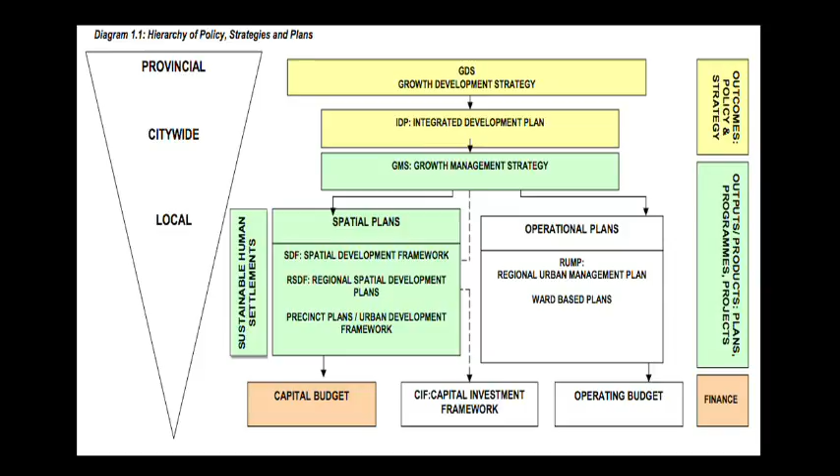Then the next level is your development planning applications—this can be rezoning, consolidation of plots, township establishment, and that sort of planning application. The other side of it is where you might work for a local authority, where you have to assess these applications and give approval.

And then the nicer field, what I think about planning, is more your spatial development, where you're looking at urban design, your layout plans for a region, township establishment, where you actually do the layout of the township. So that's sort of the various fields in town planning that you do get in South Africa.

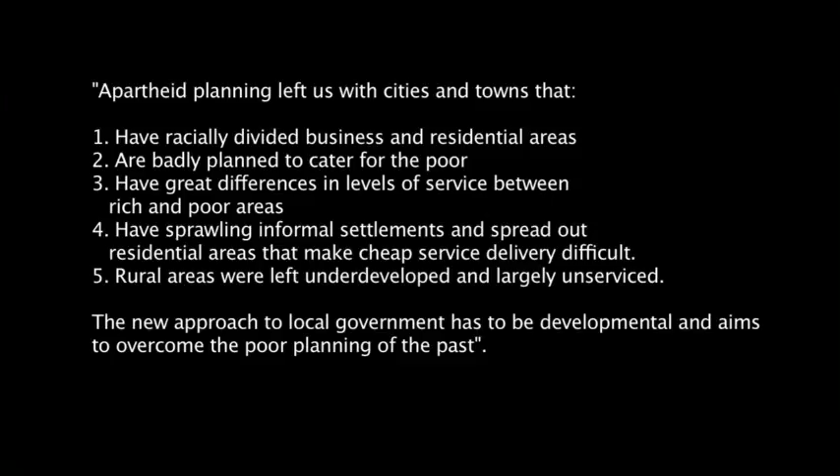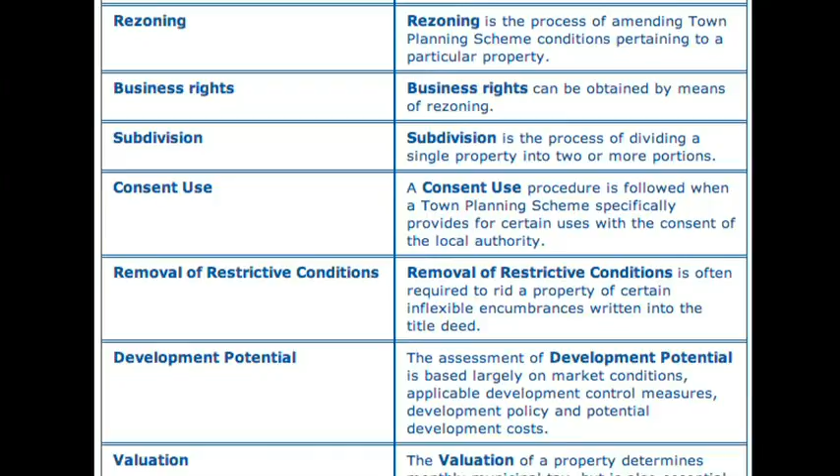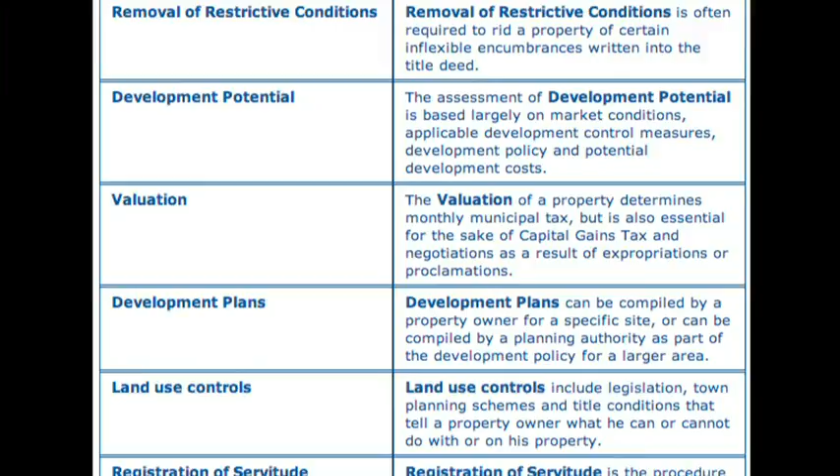Normally when you start looking at a development or get approached for a new development, it always starts with the identification of a site—whether that's in a township area or a town area, whether you need to do rezoning, consolidation. A lot of times, especially with our housing projects these days, you still need to do township establishment.

And that's where you get all your various other entities involved, like the engineers, the geotechs, the land surveyors. Township establishment specifically—where you draw your plans and then have to get your engineers involved to see if there are services, what needs to be done to get services to this area, and whether your layout plan will fit in well with the engineers, particularly stormwater, electricity, water, all sorts.

And then with the site identification, you also have to do a geotechnical report to see if the land is suitable for the type of development that you're looking for. And then you get your land surveyor.

With township establishment, you need to get approval through your Surveyor General. But that always happens most of the time after the town planning process has been approved or council is happy with the layout, because at the Surveyor General they don't want to keep on changing their plans.

So at that process already you get your engineers involved to get advice on the services, your geotechs involved with the geotechnical report, and your land surveyors to do the pegging from first the 5-meter contour, to see the layouts and how it will fit in with stormwater, up to the approval of the land survey by the Surveyor General. The thing with town and regional planning is it's always a participation process.

You always get all your parties involved from day one. You can get through the whole process and reach the end where there's no approval because people jump up and say no. Specifically with housing development, we get to the point where the township is established, the layout is done, and engineers have been involved. Part of that would be your application, either a subdivision, which is mostly the case, or a rezoning. With that you get involvement from your engineers, your water, all your service levels. After the approval has been done, from there onwards it's the council and the engineers' responsibility.

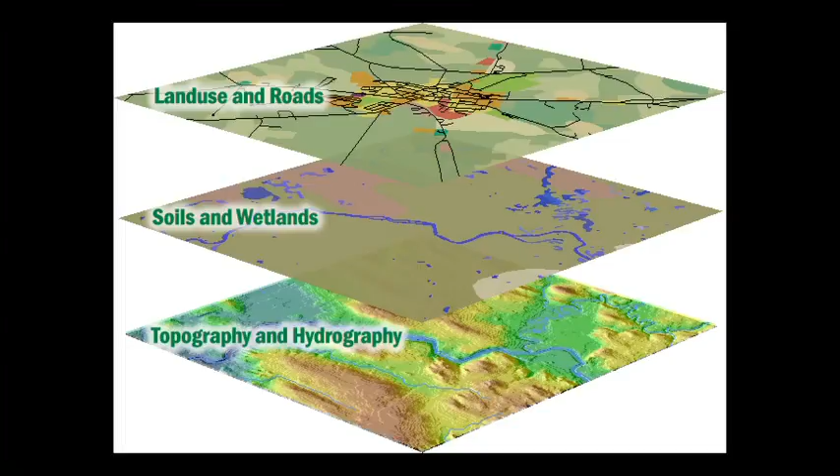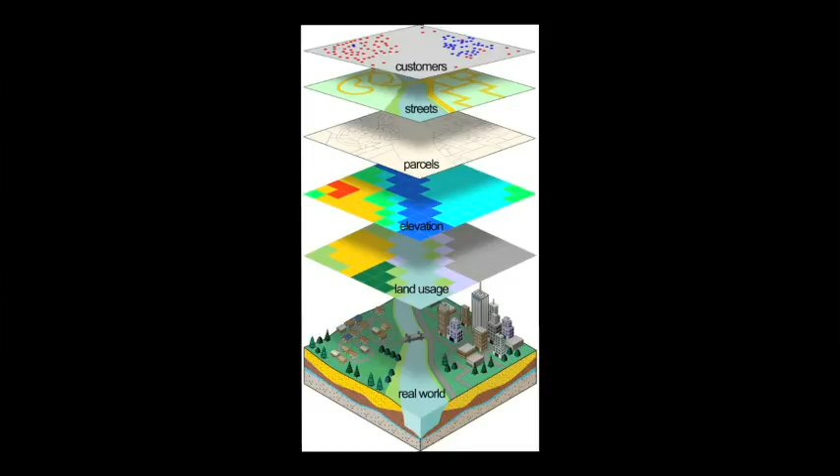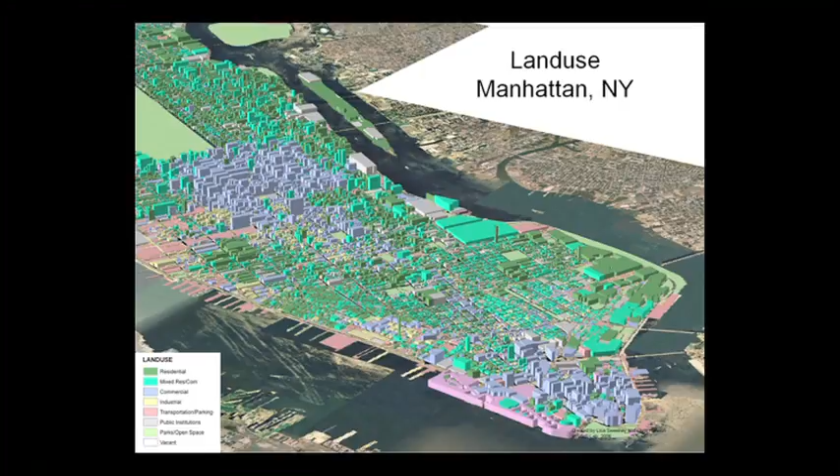I think the biggest thing these days is GIS. All your requirements when you submit a proposal for spatial development frameworks, etc., is always GIS based. That's the biggest tool that we use. It's such a big database that you can just build on. Most local authorities have GIS databases, and your spatial development framework and land use management systems are in so much detail that you can click on a site and it will tell you what is on there, what is allowed to be changed if there's a change of use, and what is not allowed. It's very specialized and in-depth, depending on how many layers you want to build, but that is such a useful tool.

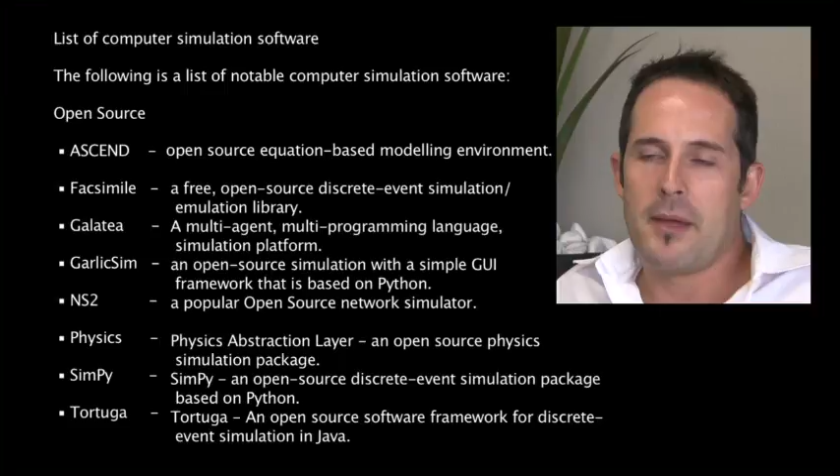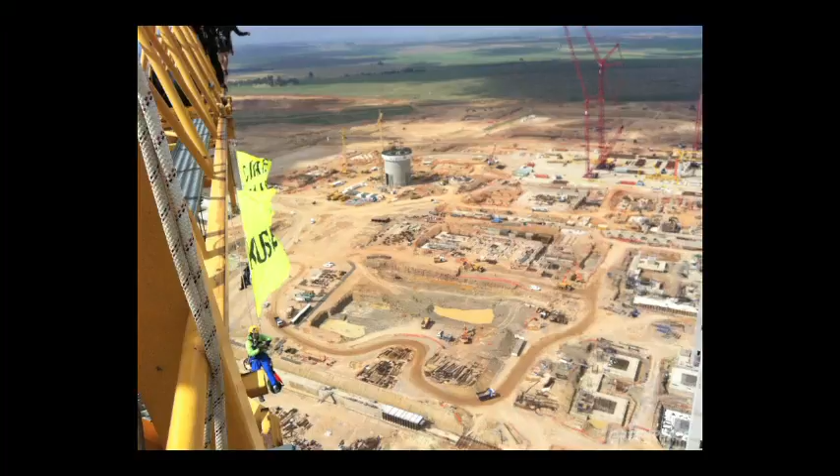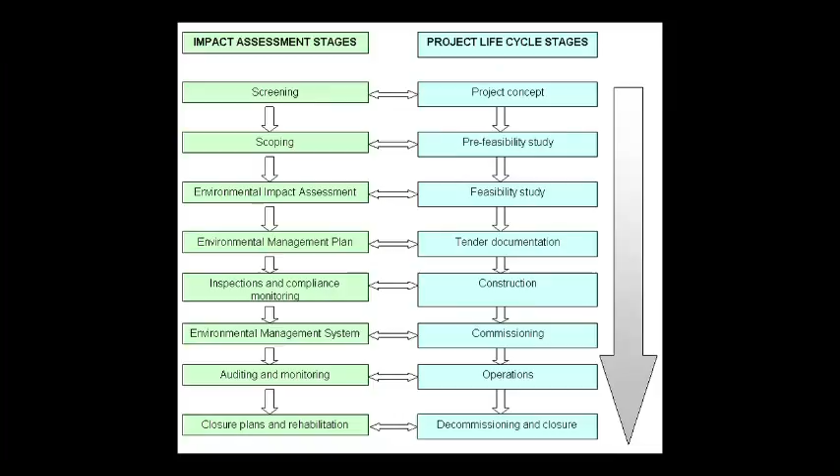Environmental is a big role these days, with your environmental impact assessment, and it depends whether it's a full EIA, the level of EIA needed with every application. It's a lengthy process and it can slow down our planning process, especially with the DFA where you have to submit everything at once to get it running. There's time for consultation and everything. I also know when you apply for a planning tender or job, normally you can't go for the environmental part as well because it's a conflict of interest. It sometimes feels that the environmentalist has all the say, especially when it gets to wetlands which are already dried up, they want to keep it, and you want to develop, and that whole process of trying to get approval can sometimes be a nightmare.

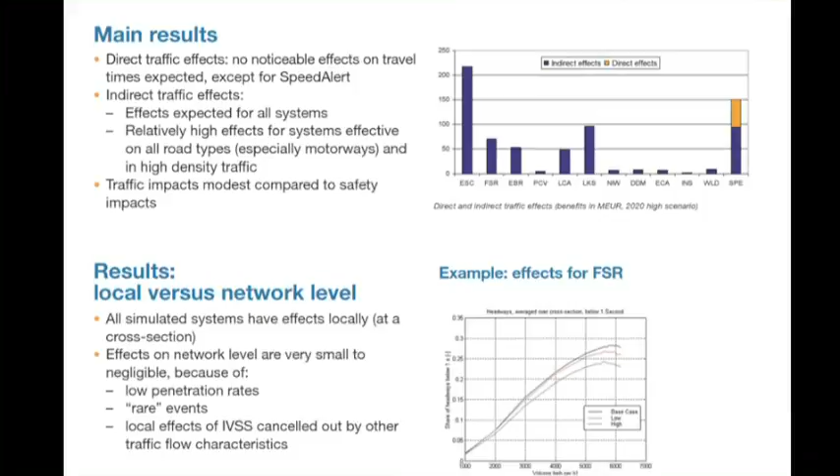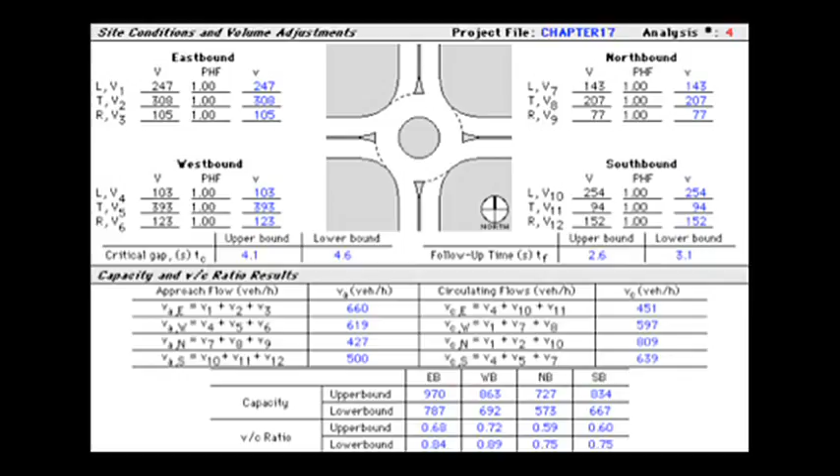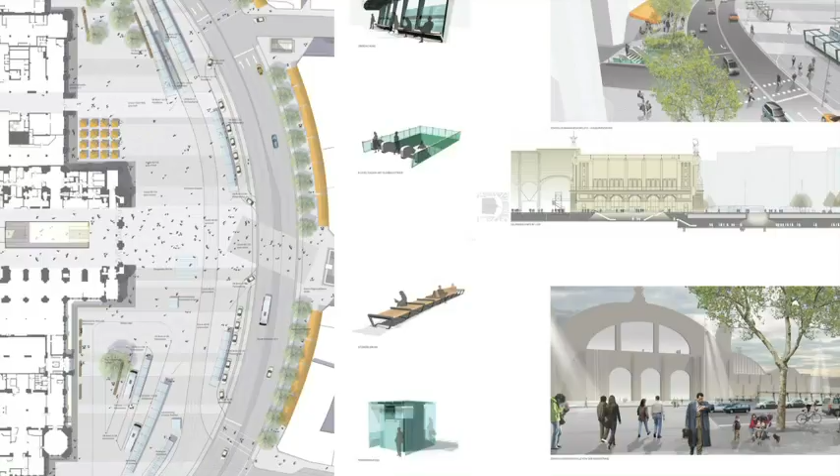Then again, traffic impact assessments for major applications are quite interesting - you need to provide that to see what more traffic would be generated. There you can go into various traffic and transport models. I know not a lot of traffic engineers are doing that. You get macro and micro simulation models, and especially the micro, it's like software such as AIMSUN, where you can even build the streetscape with pictures and actually show your client: here's your building, and this is the traffic that's going to pass there, the chaos, congestion and all that sort of thing.

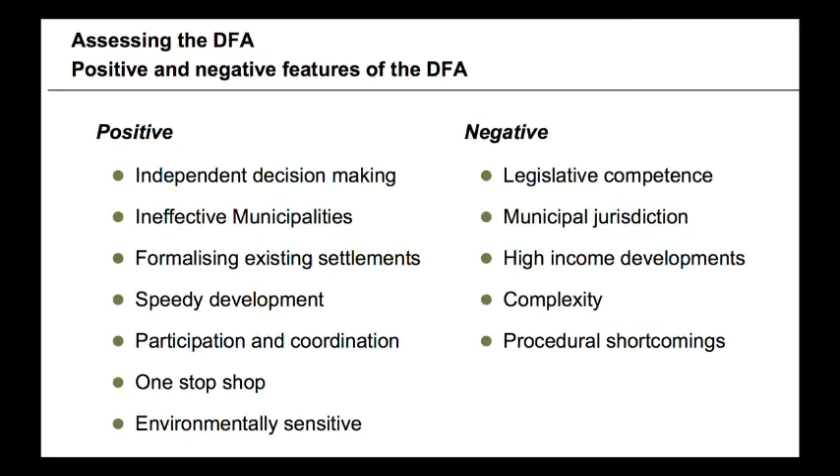There's various acts that we need to abide by - your Municipal Act, your Development Facilitation Act, your ordinance. The DFA came in basically as a quicker process, but whether it works or not is another question, because of the public consultation and the legal process an application needs to go through, it's a lengthy thing. You're looking at roughly 18 months to develop or review a spatial development framework.

My name is Piet Lombard, from PD Naidoo & Associates, Consulting Civil Engineers, and the topic we will be covering today is infrastructure design for residential, commercial, and industrial townships.

I've been a consulting engineer most of my life. I started consulting in the 60s. For about 15 years I worked with consulting engineers. Thereafter I joined Midrand Town Council as a town engineer for 3 years, after which I became a township developer for approximately 5 years, but then decided to go back into consultancy. I had my own practice for approximately 15 years, and for the last 8 years I've been working for PD Naidoo & Associates.

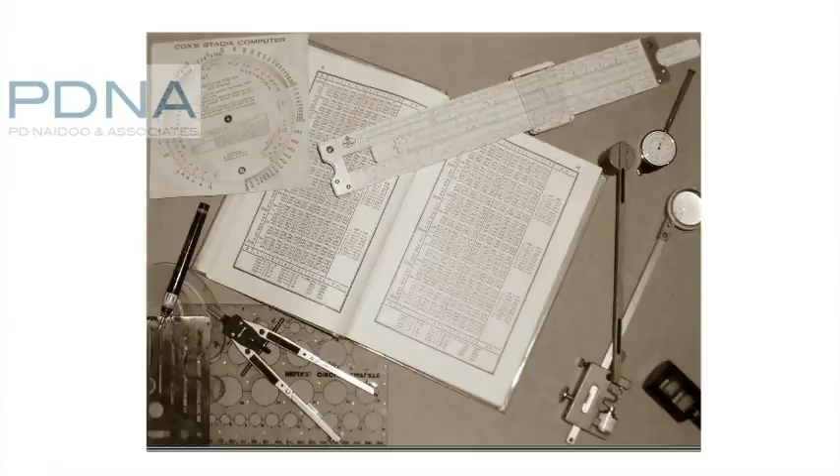For me, I think hands-on design is probably one of the most important things one must teach yourself to do. You must always try to stay abreast with the latest developments. In the 60s, to calculate the bearing and distance between two points of which you knew the coordinates was time consuming - you had to subtract one coordinate from the other, get the y and x differences, use these in formulas, and all this was done by hand. I'm very happy to say that with the software available today, it's become more and more productive to do your designs.

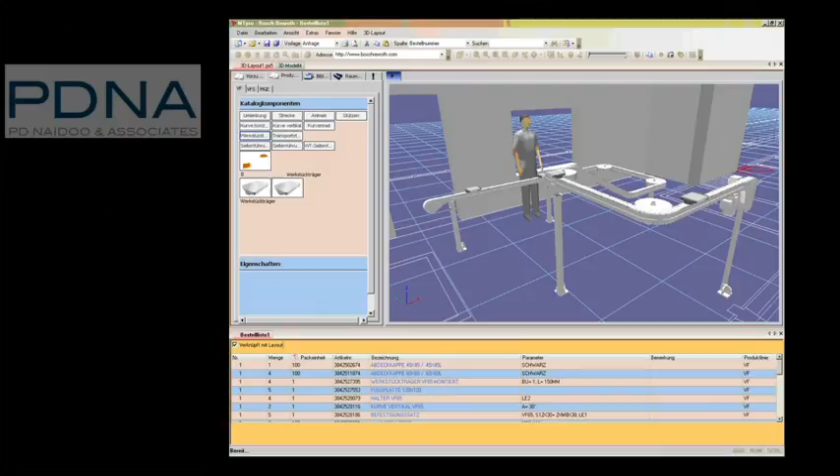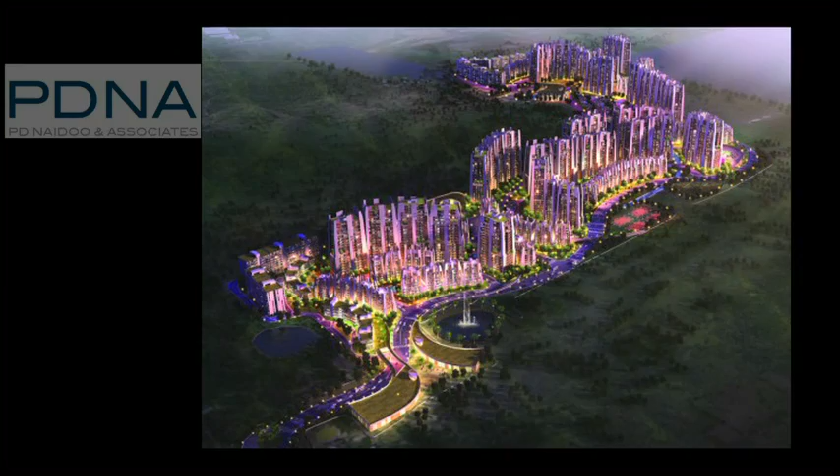I think as a consultant you always need to be proud of what you do, and most importantly you have to take responsibility for what you do. In a big company there's a tendency to think that your managers, directors, or the board of directors will take the responsibility, but I think it's very important that we all realize that what we design is our responsibility.

When you start with a project and you start designing, make sure that you gather the necessary information. Understand what the brief is from the client. Know who's who in the project, who's your town planner, who's your architect. Go to the local authority, find out what their preferences are.

They've got certain things in their municipal area that work and things that don't work. Make sure you have as much information as possible, either by physically visiting them and taking photos. Obviously there's a lot you can obtain via email and telephone, but I think to visit the local authority and introduce yourself is already a good start. Try and do that up front. Try and do your cost estimate that they want on Monday, on Saturday and Sunday, so that you can spend time with the local authority, but it's very important to go and see them.

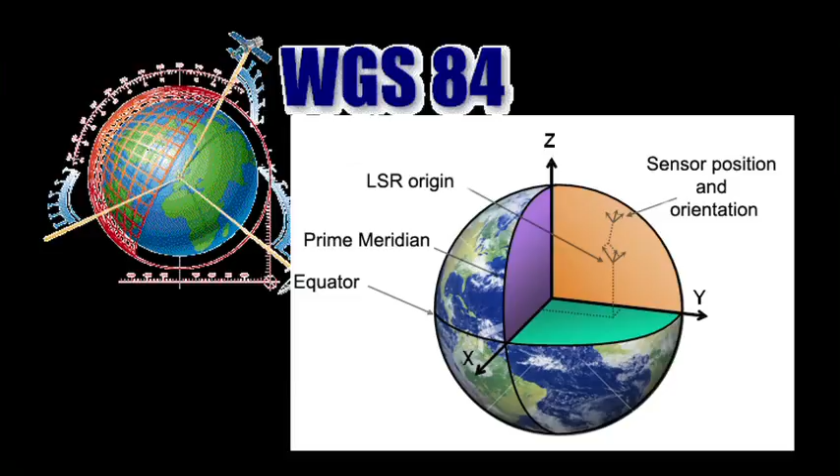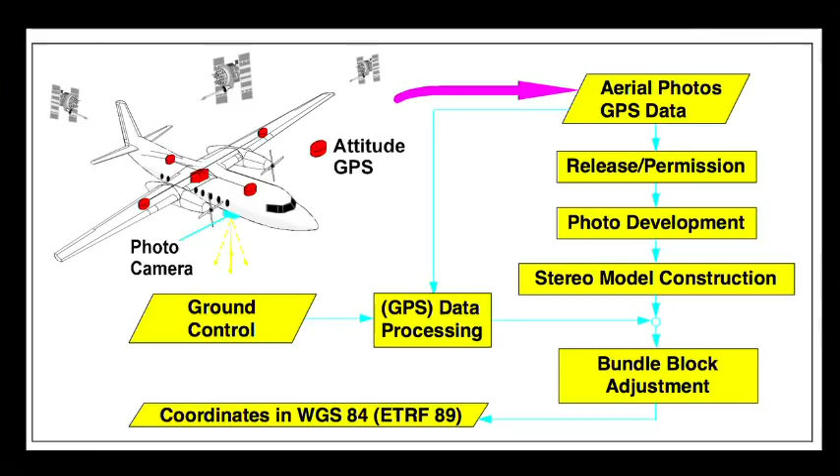Establish what the preferred positions, the depth order and the elevation ranges of certain services are. Make sure you know what survey system to use. We're bound now to use the WGS 84 system. Stick to that, and when you produce a drawing, put two tables on the drawing, one in the old system that they prefer and one in the new system. Here in the Gauteng area we work with LO 29, going a little bit westwards, maybe switch over to LO 27.

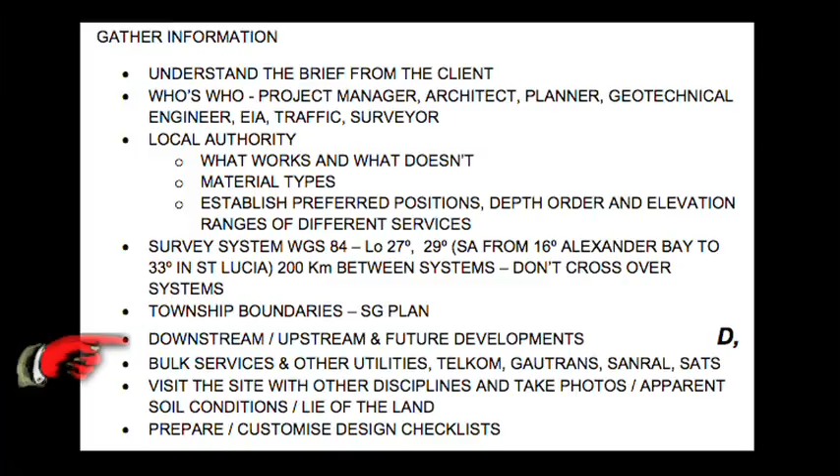But the whole of South Africa goes from LO 16 in Alexander Bay to St. Lucia, LO 33, so make sure that you're in the right corridor when you work with it. Make sure you know what the township boundaries are. Get an SG plan from the Surveyor General. Know exactly what the coordinates and the extremities of the thing are, because the whole design is going to be based on those measurements. Try and find out when this is going to happen—is it going to be 20 years before there's development upstream, or is it something that's going to come in the next couple of years? Make sure you're au fait with whatever's going to happen upstream and downstream of your township.

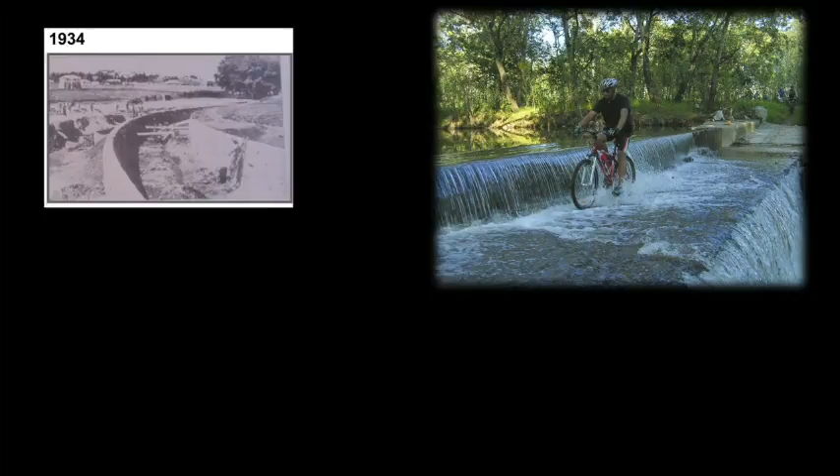One of the best examples that I have is the canal they built here just off Empire Road. The municipality of Johannesburg built that in 1934. They'd just come out of probably one of the biggest droughts this country has ever had, in 1933. And yet, while that year was going on, these guys were sitting planning and designing this monstrous stormwater canal. Up until today, it's serving its purpose. I think that is very innovative and very proactive to have done that.

Find out all about bulk services and other utilities—Telkom, Gautrans, SANRAL. Find out about these things and make sure that you are okay with that. No one else is going to do that for you. I must say lately the town planners are handling the bulk contribution side of it, but you must still know what bulk contributions are all about.

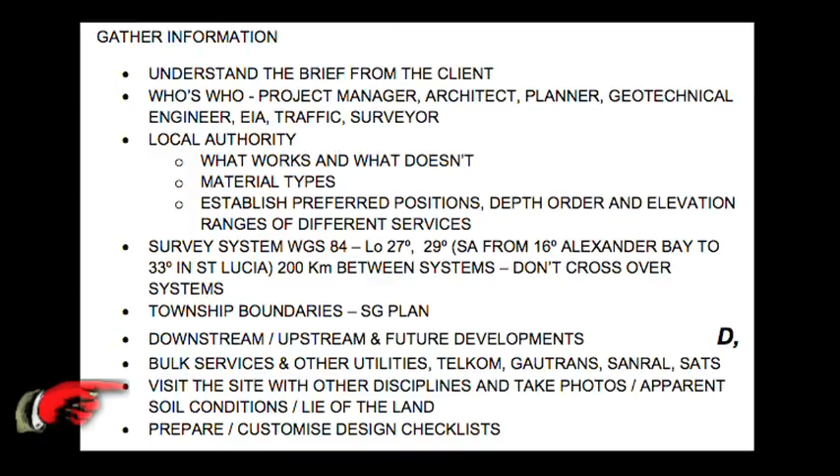Visit the site. Try and take as many people as is practical with you—I'm talking about your design team. Take them with you, and maybe even the other disciplines like the electrical engineer, the town planner, the surveyor. Go to site, have a discussion, look at a septic tank somewhere, look at a building or a shopping complex two kilometers upstream from there, and let them know what the effect of this is. You can discuss it amongst yourselves, take photographs, but make sure you visit the site.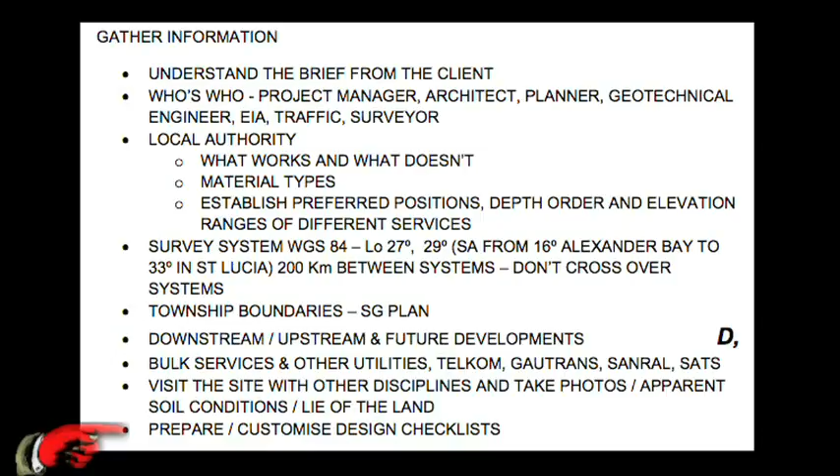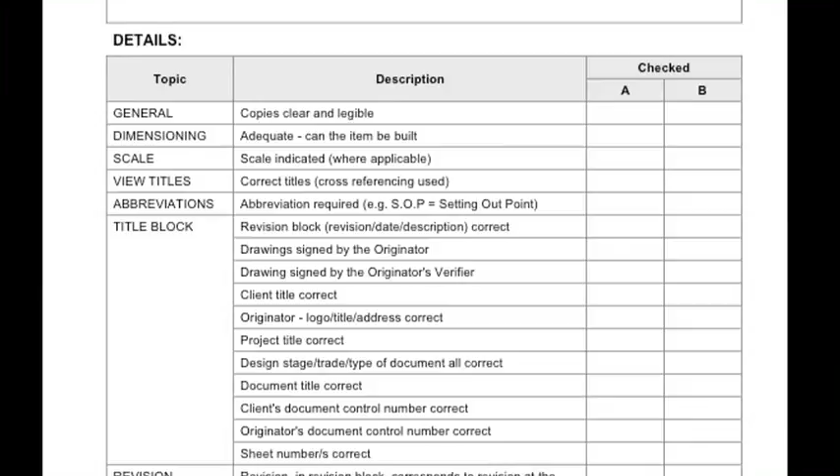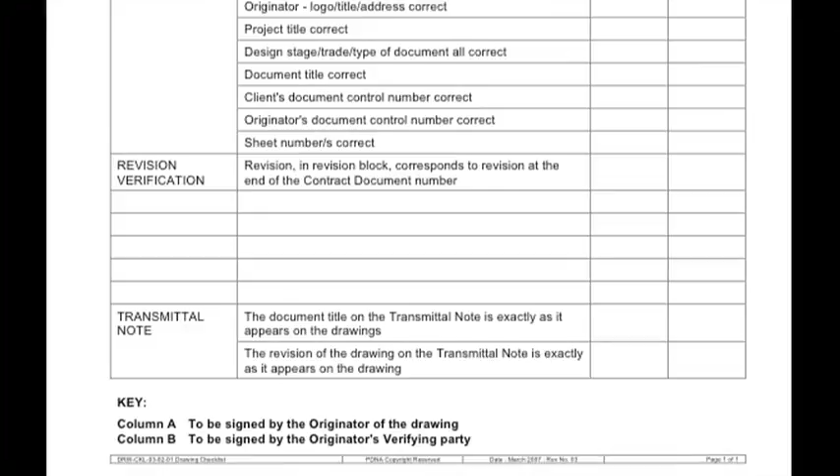We've all got checklists for when we start a design. Have you got a contour plan? Have you got the DTM? Have you got everything in place? Take these checklists and customize them, because they don't all work for the same projects in the same way. Put them in your file, on the front page, and as you do all these things that need to be done, tick them off and make sure these things fall into place. If you want to do something for a client and you want the next job that client gives out to be yours again, then maybe it's worth spending a bit of time on the first ones.

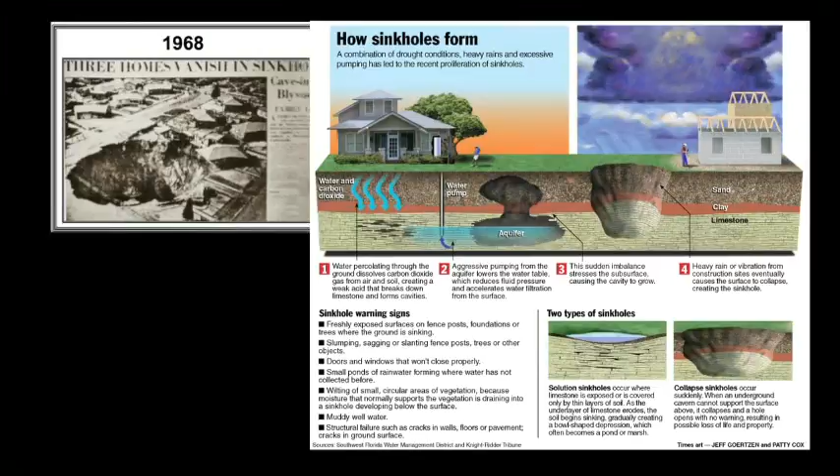The most important one is dolomite. Dolomite and water, that is something we've all got to be aware of. This slide shows a sinkhole that appeared in 1968 in a residential township, and I think 3 or 4 houses just disappeared into that sinkhole. Know what the effect of a disruption of a service is going to be, know what contamination is, and this specifically applies to sewer systems when they start leaking and running out on surface. These things are dangerous, they're life-threatening.

Try and go for green developments. Of late we are very conscious of the need for green developments. Green is expensive if you simply try to put a canal in rather than maybe a 450 millimeter pipe. But when you get to substantial stormwater flows, green is probably, it could even end up being - I won't say cheaper than the conventional system of underground pipes - but certainly from a maintenance point and a long-term point of view, probably the better choice.

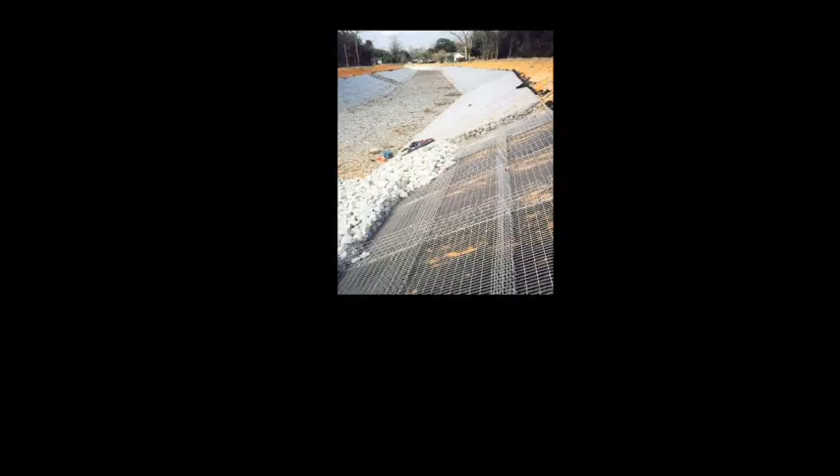For us as engineers, it's very nice to see what's happening with your stormwater. We tend to put these things into pipes and we never see what's happening to it. So to have a canal with gabions and terraces and steps in it, it's just nice for an engineer to see that.

Phase development, there's always the question: do we start phasing it from the higher end or from the lower end? Look at your bulk services, look at where your reservoirs are, look at where your sewer outfall is, and quickly do that calculation.

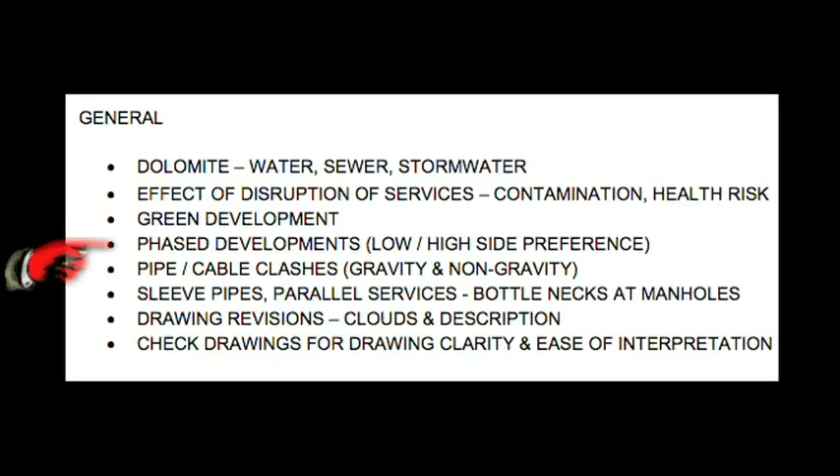Put sleeve pipes in. There's always a need for an electrical cable or a data cable or a telecom cable to be drawn in afterwards as an afterthought.

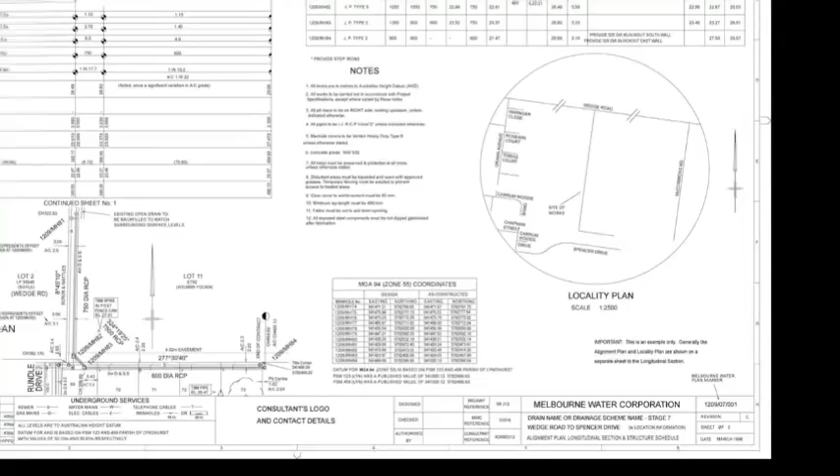When you've presented a set of drawings that goes out to construction, there's always some revisions happening on these drawings. Make sure that that is done in a proper fashion. Put revision clouds around the revisions, number them properly, and explain what it is. Don't just have a line there that says drawing changed.

Cutting corners is a dangerous thing to do, but certainly if it's a product that provides you with the same specification and there's no reason why you can't use it, then certainly do so.

Right, water reticulation. You need to know what the average daily demand is. You need to know what the peak factors are that need to be applied. You know what the fire demand is. You need to know the reservoirs in the area, what the elevation of the reservoir is, what the storage capacity is, what the static head is, obviously.

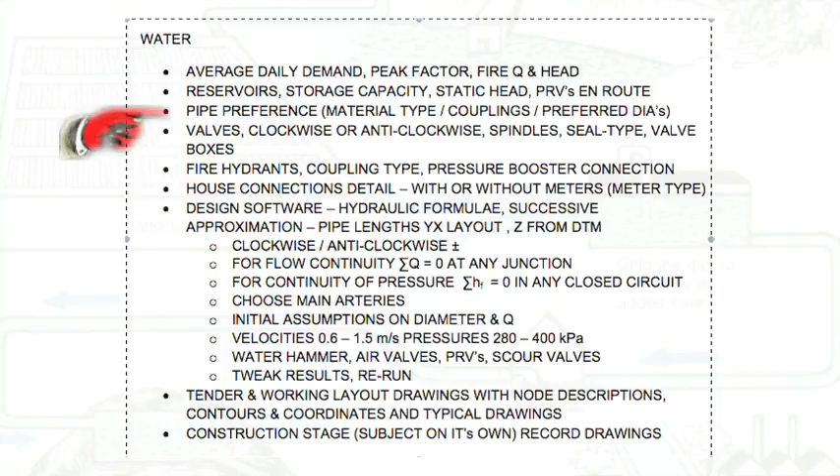The pipe preference, we've covered. Make sure you know what the pipe preference is, not only with the type of pipe, but also with the couplings - is it a Z-lock coupling, is it a Victaulic coupling - what the preferred diameters are, valves, are they clockwise or anti-clockwise closing, are the spindles rising, seal types, valve boxes - all these things you need to know.

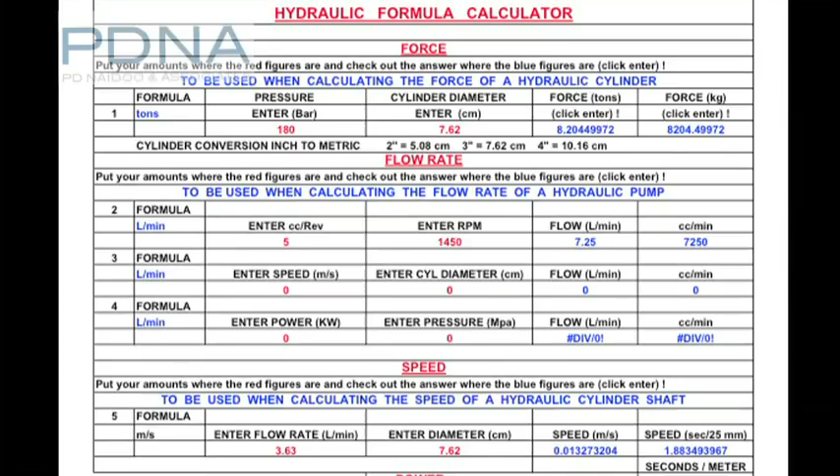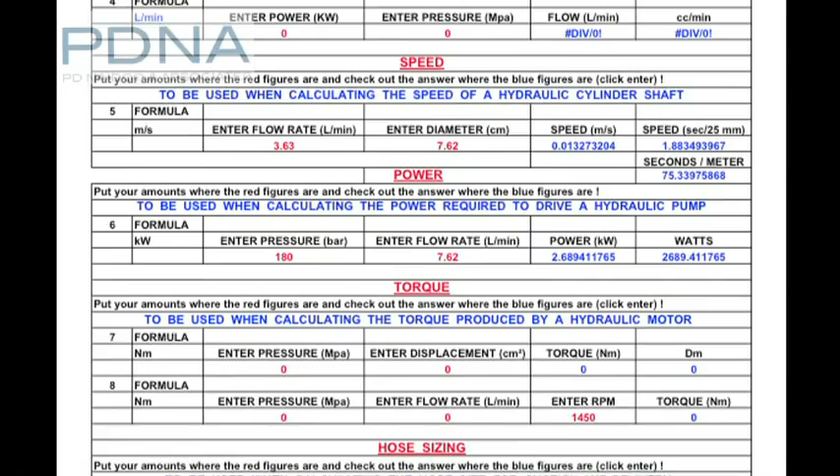Fire hydrants, very important, probably the most important. For myself, I found out that a very easy and user-friendly way of doing that is simply to take one of your hydraulic formulas, put that on Excel, and play around with stuff like your diameters and your roughnesses. Play around and just see, if I make the pipe longer but smaller, this is what happens with the head loss. It's so satisfying to spend 15 minutes with that, and at the end of it know exactly what happens.

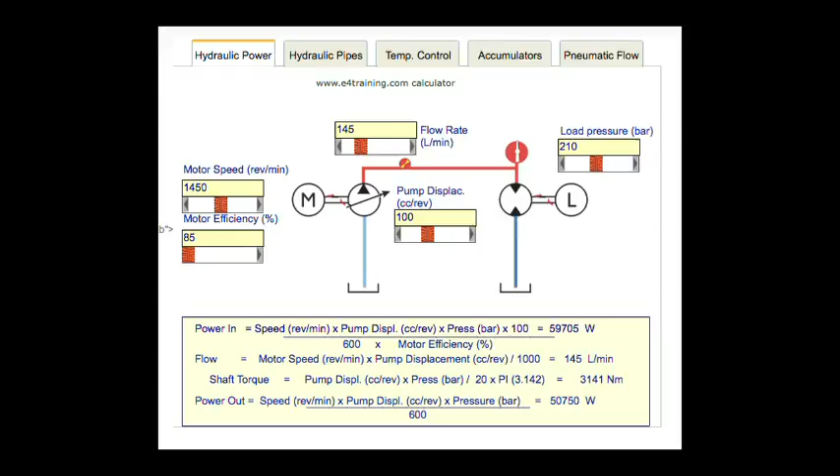So when you do your design, there are two things about hydraulic design. The one thing is that at any junction, for continuity of flow, the sum of your flows at any junction should be 0. And then for continuity of pressure, the head loss in a system - if you consider the clockwise flow as positive and the anti-clockwise as negative - the sum of the head loss in a system should be 0.

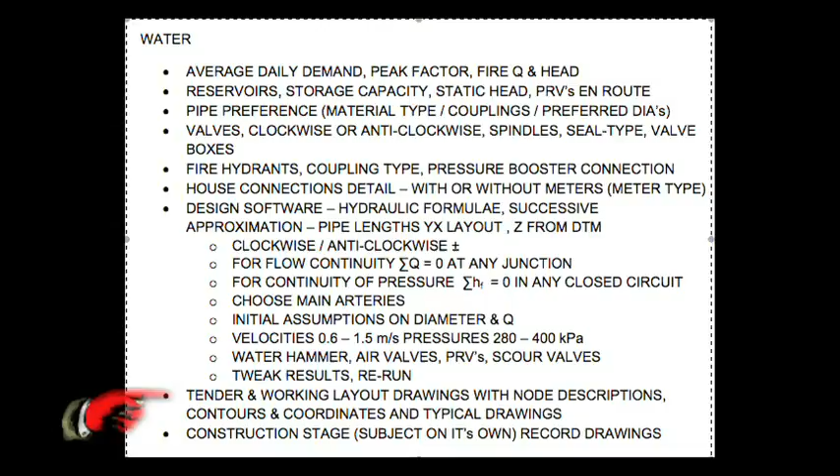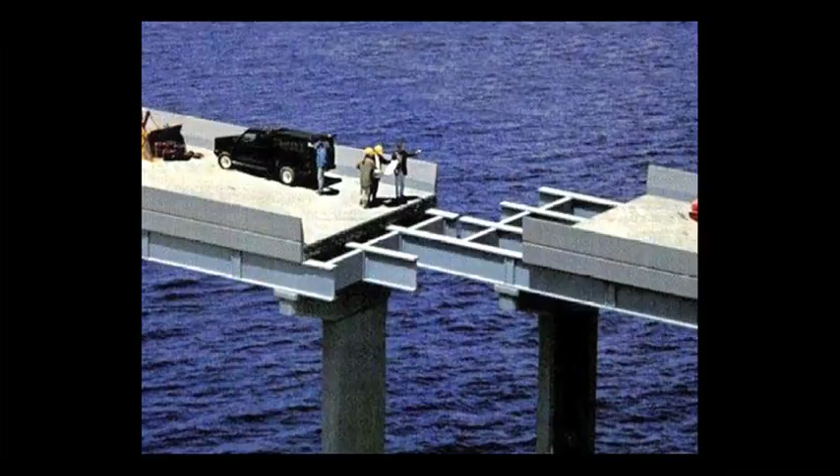And then ultimately you produce tender drawings which then get developed into working drawings. And these have to be clear. They must, when the contractor unrolls that roll of drawings, he must know exactly what to do. You as the designer might know exactly what your intention is and how you've designed it, but you must convey this across to the contractor. Contractors talk amongst each other. Everyone says that the drawings coming from your company are the drawings we want.

Then as far as the sewer is concerned, again, know what the average daily flow is, the peak factors you're going to use, the infiltration you're going to use, and certain municipalities want their sewers to flow 60 or 70 or 80% full. Make sure you understand what the mid-block sewers are all about.

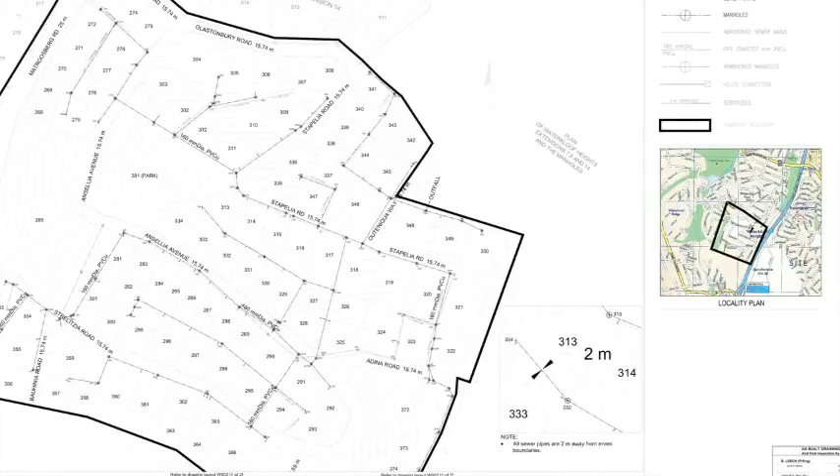Drainage zones, this is very important. When you have a big township, break it up into drainage zones. Take each drainage zone and give it a hierarchy and also a numbering system. Do your numbering system in such a way that if the contractor picks up the phone and tells you there's a problem with manhole A025, you know exactly where to go and look for it quickly on a drawing.

Have a pipe and manhole preference, the materials you get from the council again, what they prefer. Benching of a manhole is a very important thing - that's where your energy losses occur.

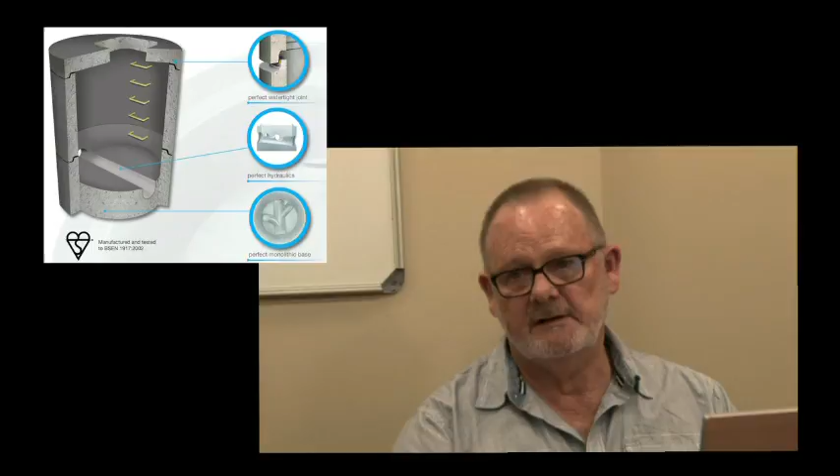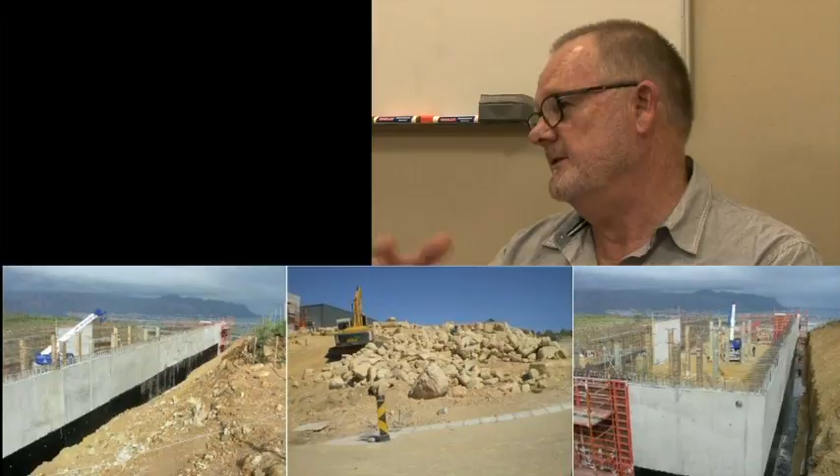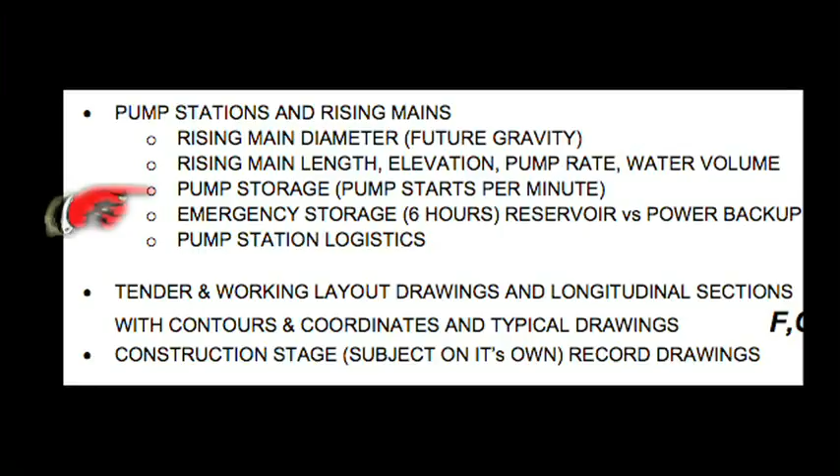Rising mains are there to carry the effluent from the pump station down to where it's going to be treated. Make sure that that rising main can one day be used as a gravity main again. Know what your pump storage is, how many pump starts you want to allow per minute, and what happens if there's a pump breakdown, or a power failure, or whatever the case may be.

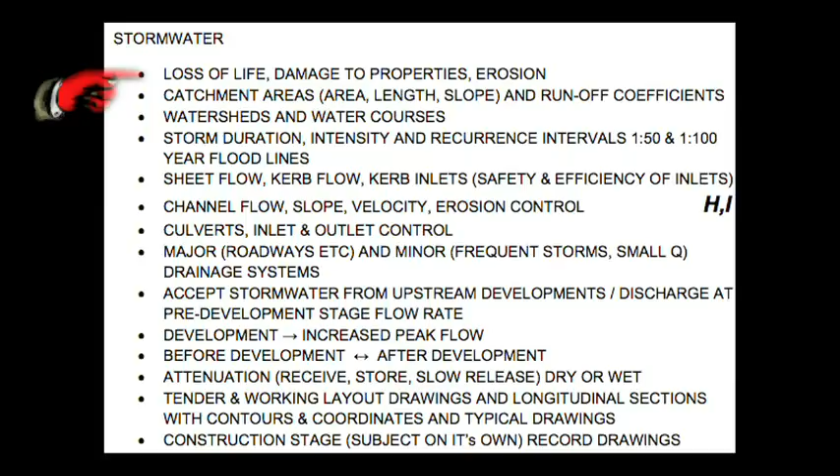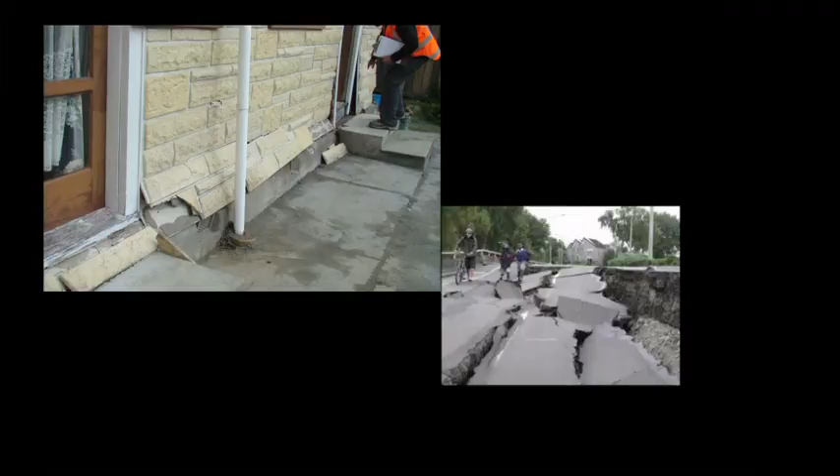Stormwater. Stormwater is one of the disciplines that I feel most strongly about when it comes to having regard for loss of life, damage to properties, and erosion. This is what stormwater does. Stormwater causes havoc when there's a big storm.

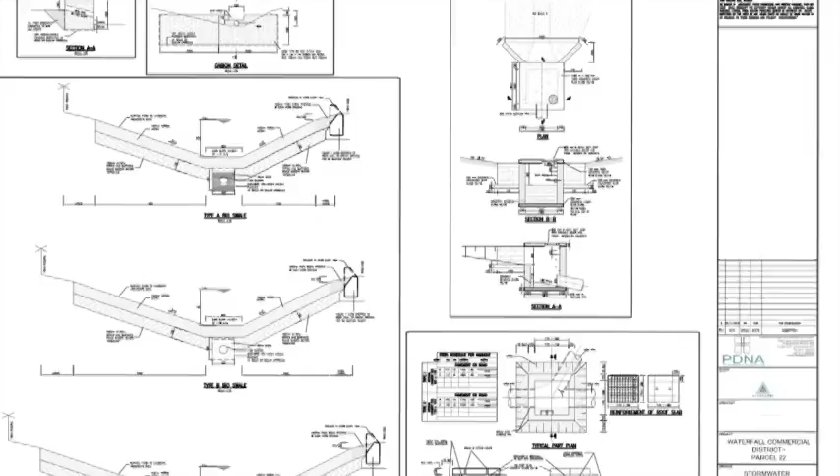You must know where the catchment areas are, what the lengths of them are, and obviously the slopes and the runoff coefficients that you're going to use. Not only on the day when you do the design, but somewhere in the future there's going to be development, and development causes extra runoff which creates problems. A 1 in 50 year flood must have the same effect on a development as the situation was before development. The way to deal with this is to provide an attenuation pond.

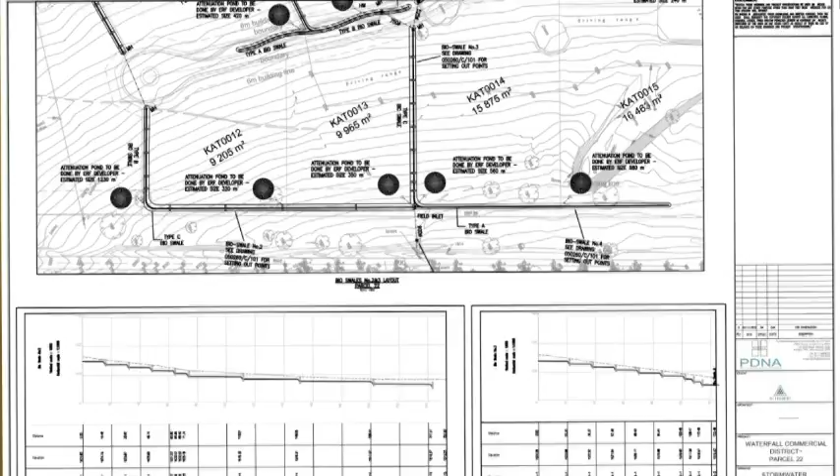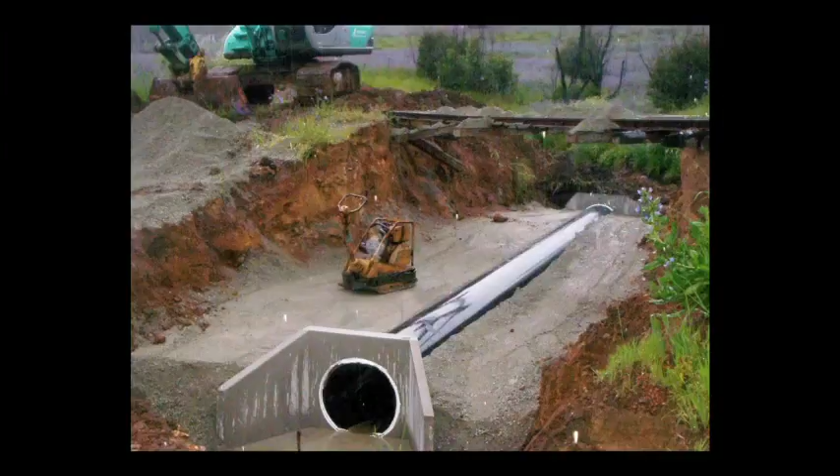Culverts normally take water from one side of the road to the other. They can be circular or rectangular, but there are normally changing velocities happening at the entrance and at the exit, and these have to be controlled, managed, and erosion protection has to take place at these culverts.

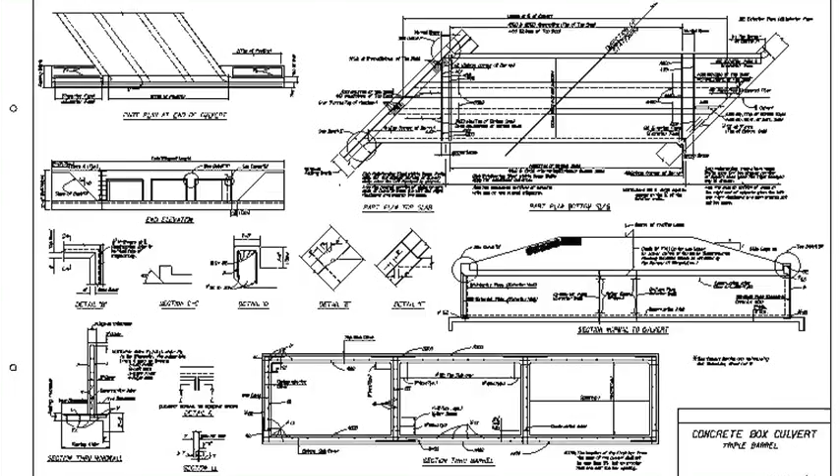Know what your major and minor stormwater systems are. Make sure you have a proper set of drawings so that the local authority knows the capacity of your attenuation pond and the type of storm, in case there's a problem and something needs to be done about it, or not.

Then moving over to roads. There are two aspects: the geometric design of roads and the structural design of roads. For geometric design, you need to look at the different types of roads you get - trunk roads, distributor roads, access roads, and collector roads.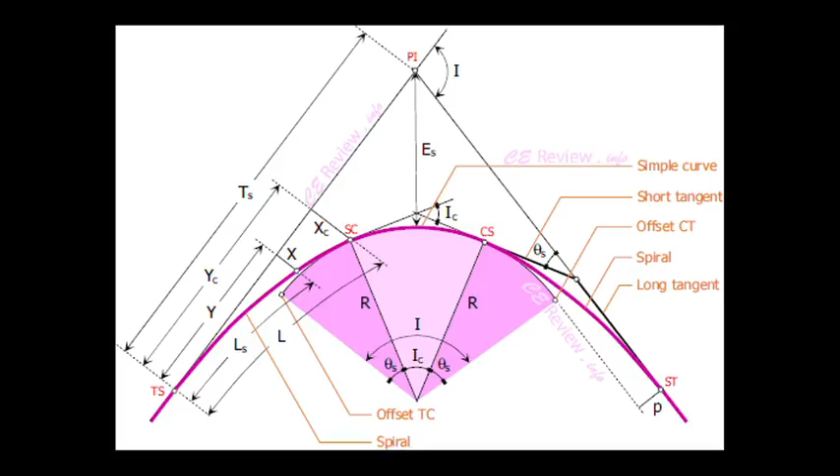You need to have a traffic impact assessment study done. You need to know what the speed zones are going to be on these roads. Curvature, super elevation, transition curves, and degrees of curvature are all terms that you need to equip yourself with.

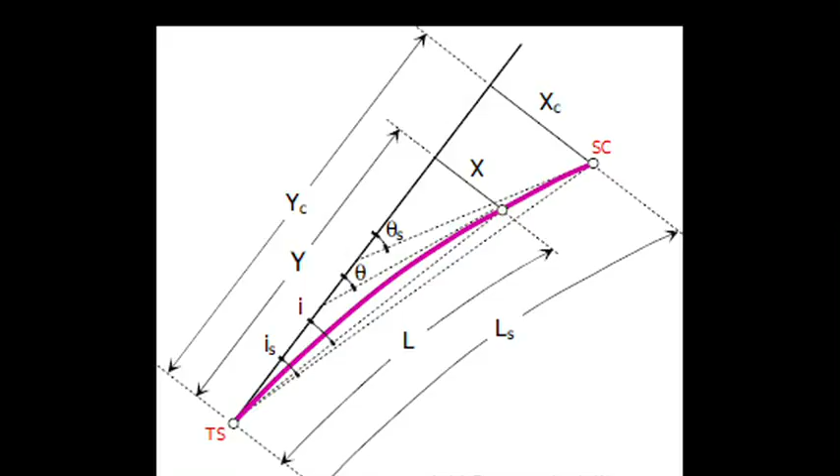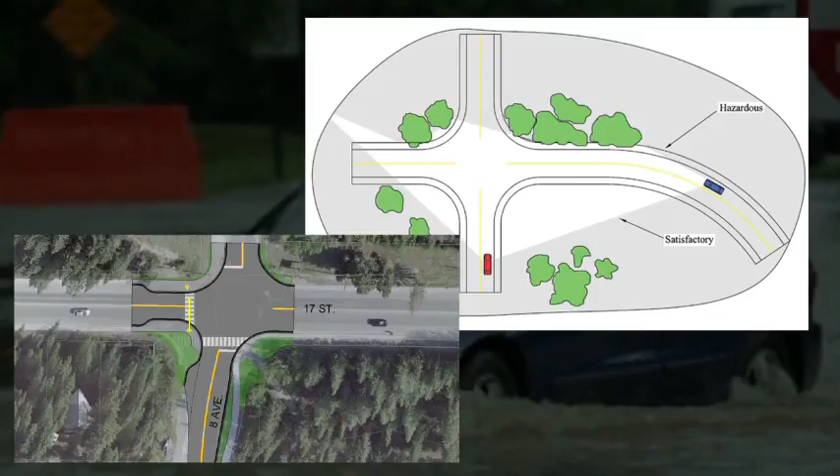On a geometric design, you need to do slip lanes, tapers, bus lanes, and auxiliary lanes like climbing lanes and deceleration lanes. All of these lanes have to be done at certain rates, certain widths, and certain slopes. When you do your intersections, make sure you do a contour design to see where there's going to be water ponding.

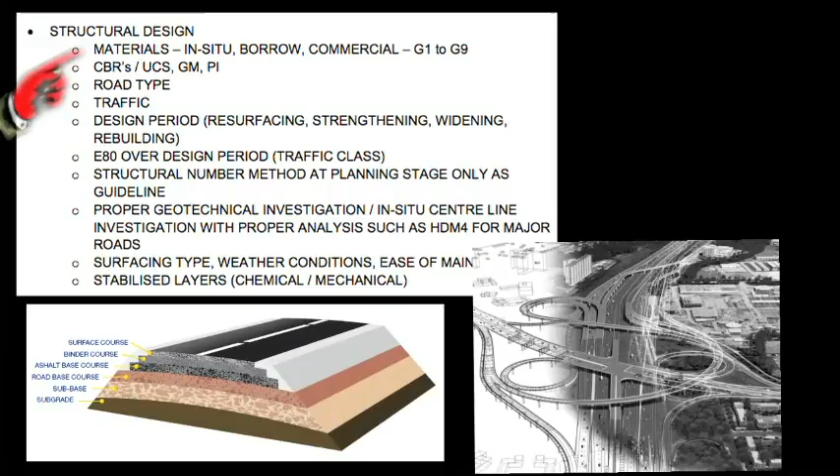When it comes to the structural design of the road, you need to know what kind of materials you will be using - the in situ or borrow material. These classifications normally vary from a G1 right through to a G9, and you must know what the properties of these different materials are.

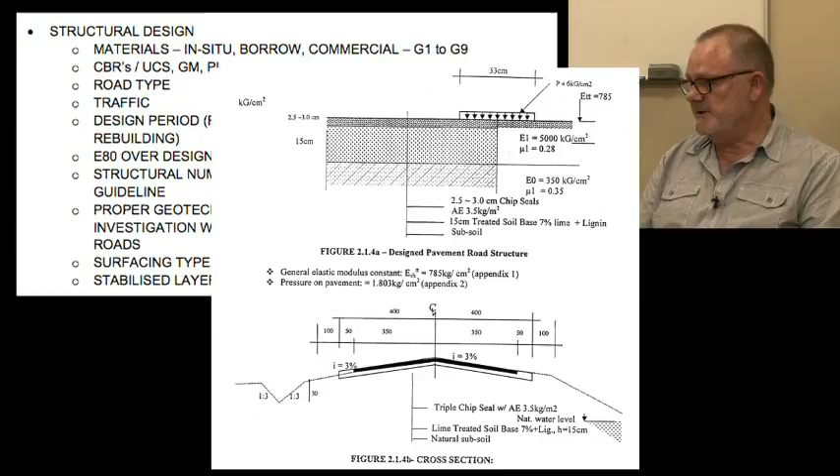To do a structural design on the road, you need to be scientific in your approach. How much traffic is going to be on the road? Heavy traffic, E80s.

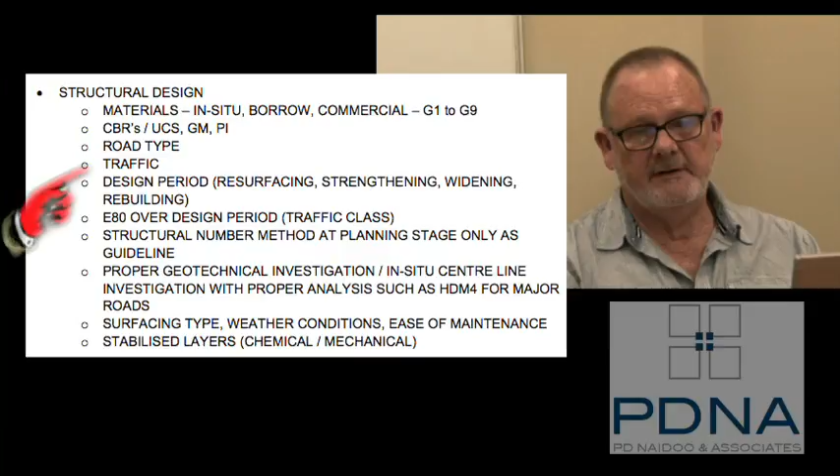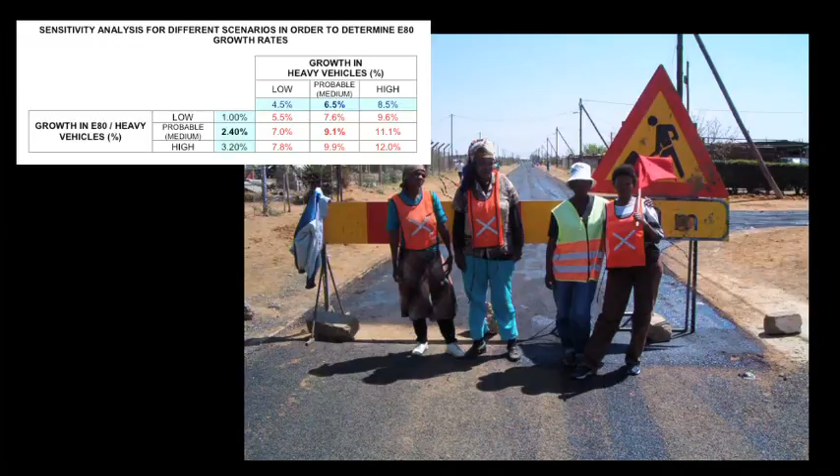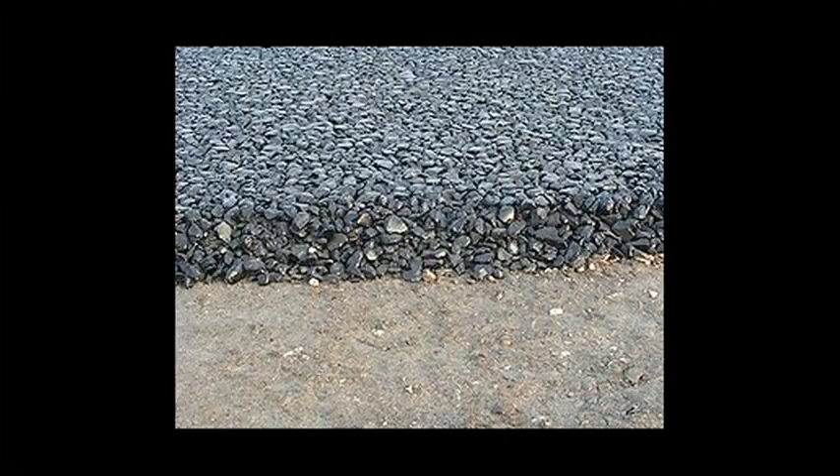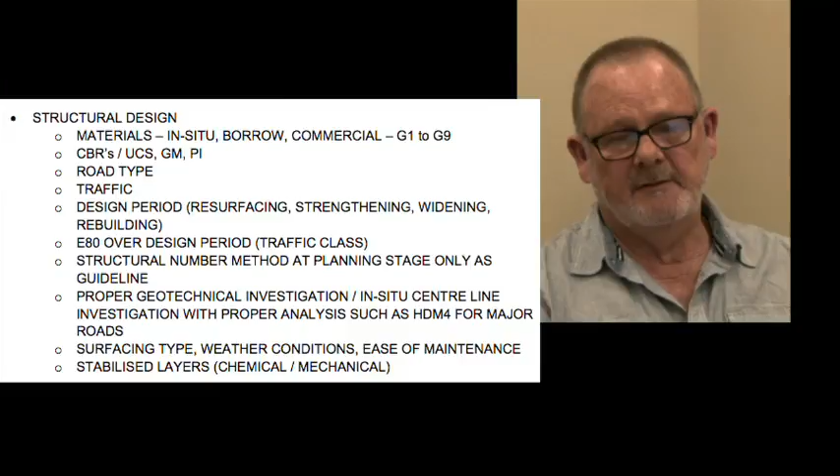What is the design life required for the road, what maintenance is needed and to what degree, what surfacing type are you going to use, and what are the weather conditions of the area in which these roads are going to be built. One needs a proper geotechnical investigation, and a centerline survey if you're talking national roads and provincial roads. All of this information is required before the design of a road can take place.

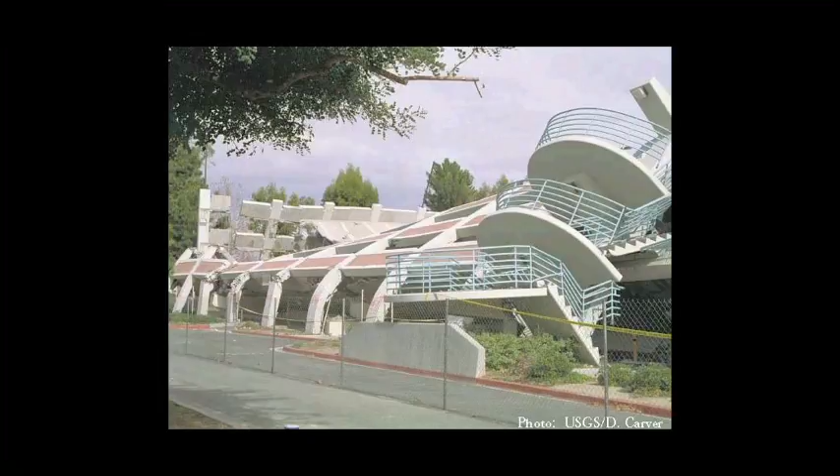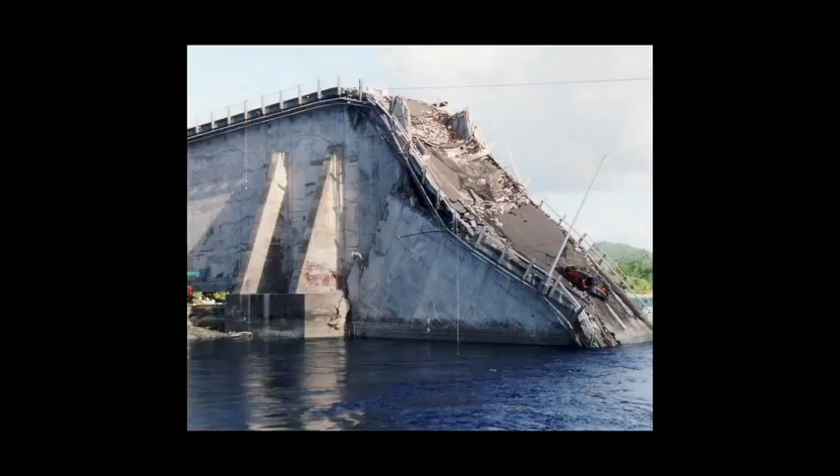As far as risk is concerned, I think it's important for you to think that you are not insured. Make sure that when you do a design, the risk you're taking is a calculated risk.

In summary, over the last decades, standards have been set, tested, and revised, so they're there - make use of them. Do whatever design you do according to the minimum standards required. Always make sure that safety and quality of life is number one on your list of priorities. Take ownership of your designs, be responsible. You need continuous professional development - you need to continuously step up and make sure you have the latest design software and the latest methods at your fingertips.